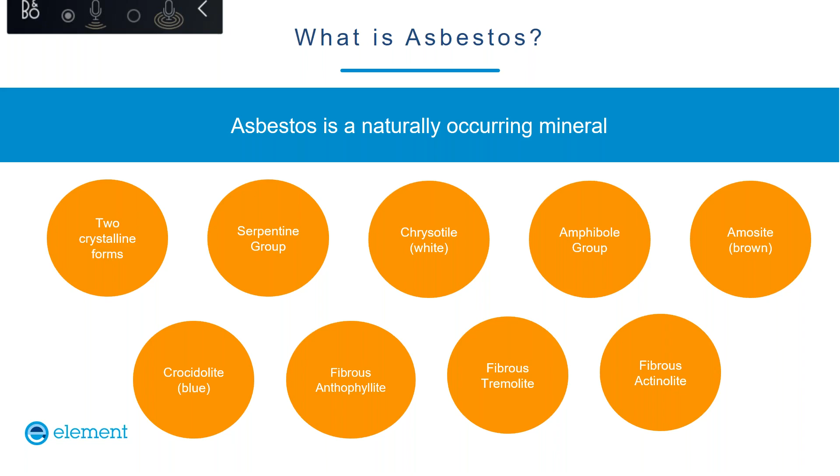It's a mineral found in two particular forms, two different groups. One is called the serpentine group, which is a bit of a misnomer because it contains one type of asbestos, and that is chrysotile. Chrysotile is commonly known as white asbestos because it is white, except when it's green, or blue, or purple, or orange. Chrysotile is the only type of asbestos that can be dyed.

Its crystal structure has hydroxyl groups, so it is very hydrophilic. That's why it's used in cement manufacture so much - it holds the water to allow asbestos cement to cure, but it can be dyed. So do not be fooled into thinking that if you see woven materials that are orange, they may not be asbestos.

The second group is called the amphibole group, and they contain the remaining 5 types of asbestos, as there are 6 recognized. Amosite, with a common name of brown asbestos, crocidolite, common name blue, and then another 3 types: anthophyllite, tremolite, and actinolite. The last 3 are not particularly commercially used at all.

They have some issues with them, of course the health issues. They appear in a number of places as contaminants really. Tremolite is quite commonly found in the mountains in Ras Al Khaimah, Fujairah, as is chrysotile.

But it's the fact that these things are rocks which makes them great for the purpose they're used for. It's rock, ground down into fibrous material, chemically resistant, fire resistant, heat resistant - and it is those particular properties that make it so good as a building material. It's unfortunate that it's exactly those same properties that cause it to be hazardous.

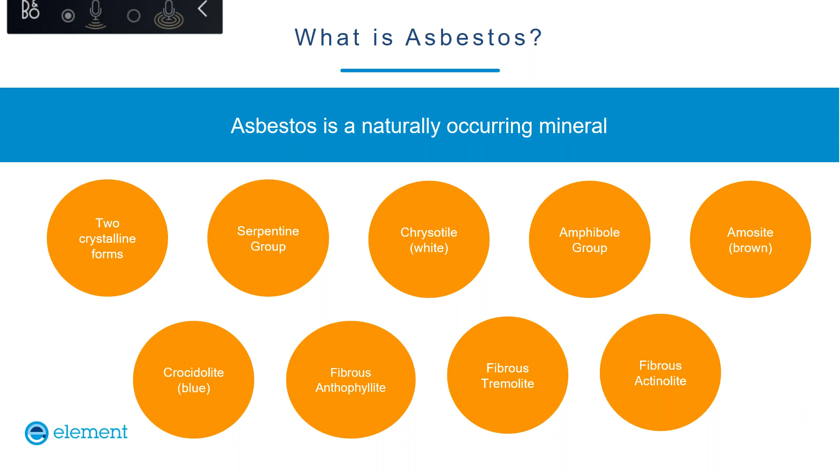Just a quick brief through this. I'll let it run. It's just to give you an idea that it's been around for a long time.

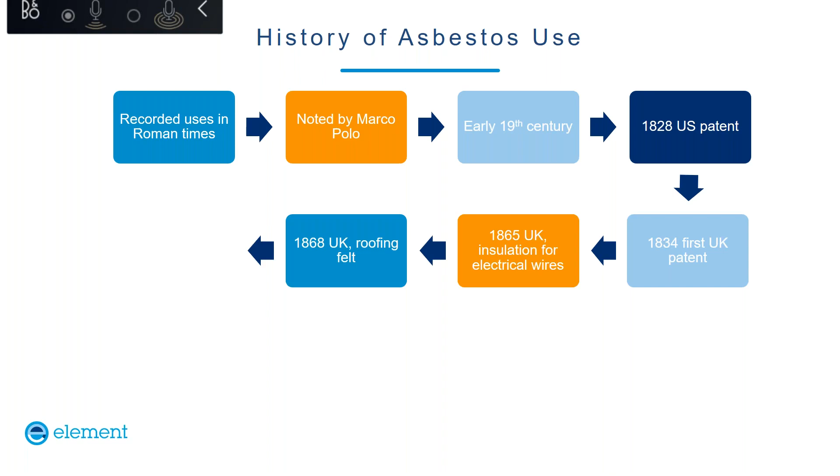Most people would assume this is something invented in the 60s and 70s, but the earliest recorded use of asbestos, and this is guesswork, is in Roman times by Pliny, who wrote about the never-ending wick used in the temples of Vesta. That is almost certainly a case of woven chrysotile.

It was noted by Marco Polo in China, where they used it in tablecloths, and quite usefully, once the tablecloths got dirty, they simply threw them into a fire. It burned everything else off, and they took the tablecloth back out. So it's been around a long time.

Its first uses were in the early 19th century, in the 1800s, when it was used for insulation material. In the UK, the first use was in 1865, even in 1868 in roofing felt. So we're talking 150 years here that it's been in use, in construction boards, and then it obviously became the wonder building material in the 60s and 70s.

Just because you might be dealing with buildings - although it's different in the UAE, there aren't that many old buildings - but taking a wider view, just because you're dealing with buildings perhaps older than the 70s, there's no likelihood of asbestos - that is simply not true. The material has been around and been used for a great deal of time.

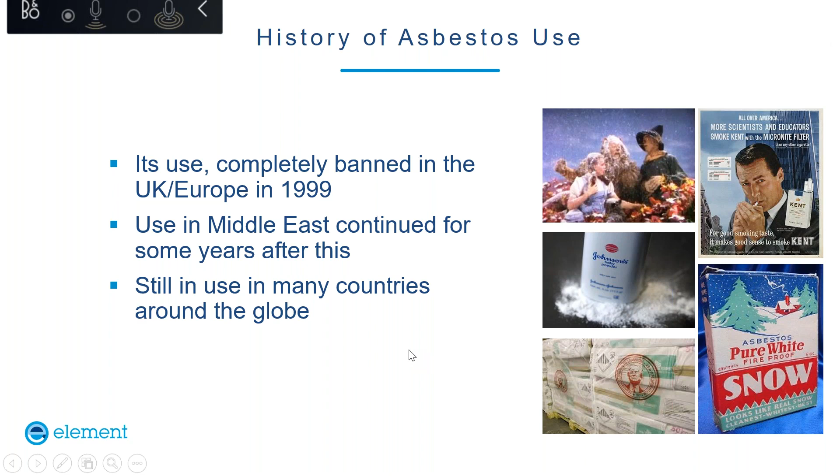Nope. Why is it not moving on now? Thank you. Anyway, yeah, clearly an obvious question.

Why is asbestos dangerous? As I've said, it's a rock. It's resistant to chemicals, to heat, etc. So we have asbestos.

Asbestos has the wonderful property that, although it's a rock, if you break it up, it cleaves down to smaller and smaller fibers. It cleaves along the unit cell and becomes finer and finer and finer. Those fibers can become extremely small, microscopic, and they can be breathed in during disturbance.

So the major health effects associated with asbestos are to do with the inhalation of airborne asbestos fibres. There are some health effects associated with ingestion of asbestos, but they're not so common. And people may ask, well, who on earth is going to eat asbestos?

But if you happen to be in the US, the vast majority of their interstate water pipelines that were laid in the 50s, 60s and 70s, carrying water from wetter areas to their arid states, are through chrysotile asbestos cement pipes, which slowly degrade and bleed asbestos into the water. So there is in fact even a World Health Organization limit for asbestos in drinking water for that particular reason.

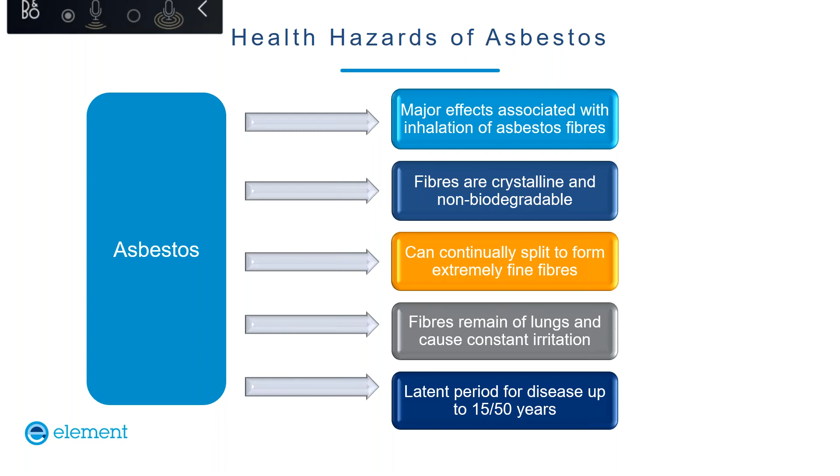Right to the far end of the lungs, to the alveoli, where gas transportation takes place, and they can sit there for many years and not biodegrade. So they just sit there, irritating the lung for years upon years. That can build up calcification, and form all sorts of other issues and diseases, which can take anywhere from 10, 15, 20, or 30 years before the occurrence of a disease.

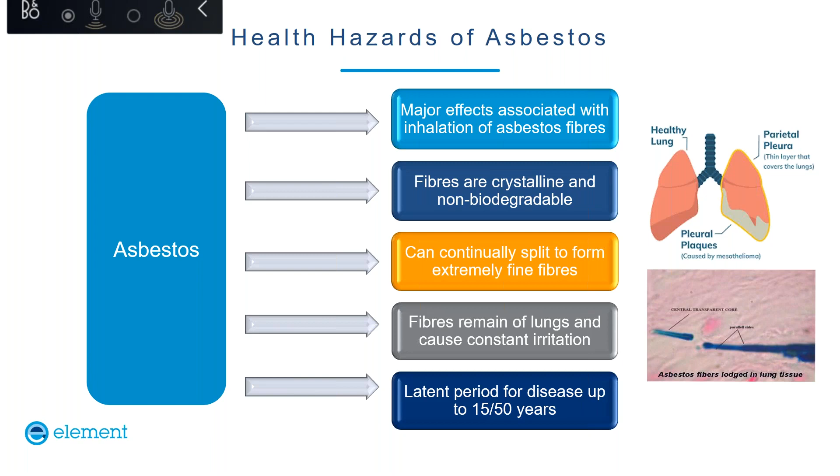So trying to track back asbestos exposure is an extremely difficult thing. A couple of pictures there, unfortunately post-mortem, which is really the only way to identify asbestosis or mesothelioma in the lungs. So, having said what the problem is, because they can sit there for years...

What are the most common diseases associated with asbestos? The one that everyone knows about, or most people will have heard of, is asbestosis. Asbestosis is actually a form of pneumoconiosis, a Greek word that quite literally means dust in the lung. There are three types of pneumoconiosis: asbestosis, silicosis, and miner's black lung disease.

The other two forms, if someone is removed from that particular source - if they're a miner and they're taken out, or a stonemason who develops silicosis and is taken out of that environment - then there is every likelihood of some form of recovery, and they will not degrade any further.

However, asbestosis is not like that. Once it's been diagnosed, yes, removing someone from the source of exposure will potentially help and slow the progression of the disease, but invariably it is a fatal disease, and can continue for perhaps 4, 5, or 10 years.

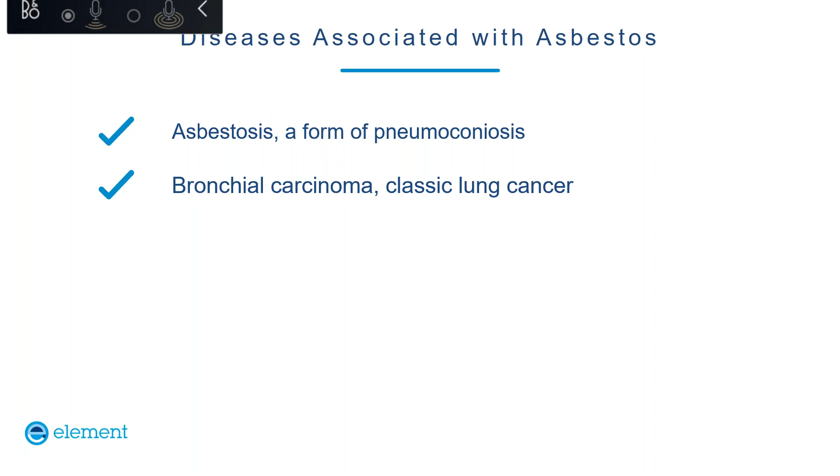It is not really appropriate now for anyone on this call, as we are not asbestos workers. Again, it's associated with classic lung cancer, bronchial carcinoma. If you're exposed to asbestos regularly and smoke, the risk factors increase almost exponentially. There are some other cancers of the gastrointestinal tract and larynx, where people have ingested asbestos.

Pleural plaques, thickening conditions - this is where some of the fibers sit in the lungs over many years, and what the body does to protect itself is build up calcium around that particular area, and that part of the lung is affected by what's known as a pleural plaque and becomes non-functional. In reality, most of us, unless we're an Olympic athlete, have a great deal of excess capacity - 30-40% excess capacity in our lungs. So if small areas become non-functional, it's not a particularly serious issue.

What is a serious issue is a disease called mesothelioma. There are two types, pleural and peritoneal. Principally associated with asbestos inhalation, pleural mesothelioma is a major killer. It is a cancer of the pleura, which is a lining of the lung.

Without sounding dramatic or meaning to frighten anyone, mesothelioma has never been shown to be dose related. In theory, and I stress this only in theory, a single exposure at any time to asbestos can result in a mesothelioma 5, 10, 15, or 25 years later. Clearly it's very difficult epidemiologically to prove that - how do you go to a doctor, be diagnosed with mesothelioma, and say, oh yeah, I remember I was exposed to asbestos 28 years ago last Tuesday. As I said, in theory, a single exposure can result in mesothelioma.

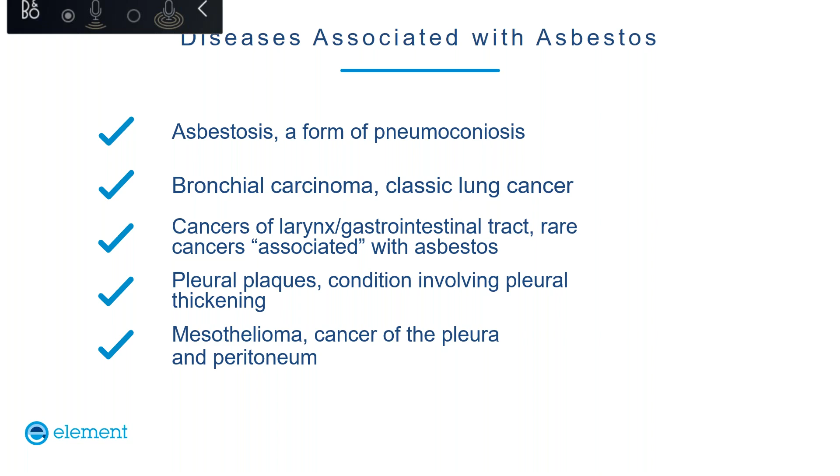That is the major cause of concern, because quite simply, this is how most people become exposed these days - accidentally, in drilling holes in walls, knocking down ceilings, changing pipes, this sort of stuff. So that is the major concern going forward.

Just a couple of pictures here - the first is club fingers, which is a very common side effect of asbestosis. The second is a picture of someone who has a combination of mesothelioma and asbestosis, in an X-ray taken post-mortem.

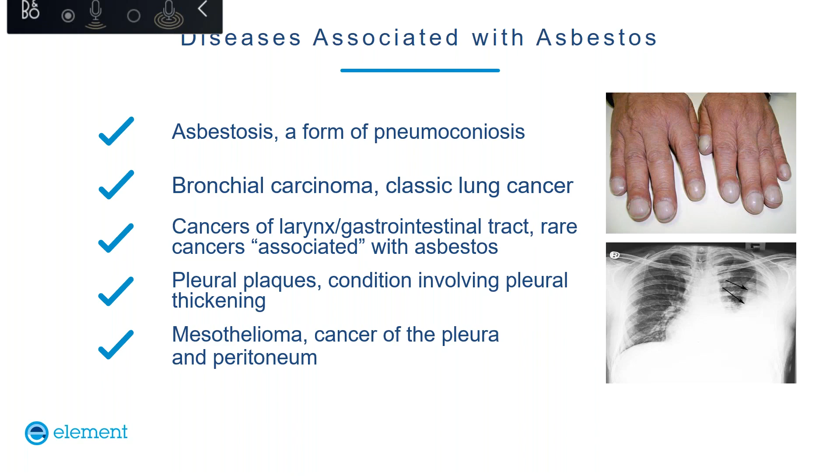So, as I said, without scaring anyone, why is it still a problem? Well, at the moment, I'm taking these figures from the UK and Europe, where figures are readily available - they are not so available in the Middle East. So I think we have to take some inference from these UK figures and extrapolate if we can. Over 3,000 people die each year in the UK.

It's the biggest industrial killer. More people still die in the UK from asbestos-related diseases than are killed on the roads. So, it's very, very serious business. Figures are not available for the Middle East, but I think for us to say the problem doesn't exist would be complete nonsense. We know it does.

One of the other things about asbestos - and I run across this quite a lot - is that people find it, and the first thing they want to do is start ripping it out and getting rid of it. Going back to what I said earlier, the major health issue associated with asbestos is the inhalation of asbestos fibres. Asbestos materials that are tightly bound, well covered, sealed, do not release asbestos. So just because people find asbestos does not mean you immediately start hauling it out, where you may in fact be creating a problem where one doesn't exist. That's worth mentioning.

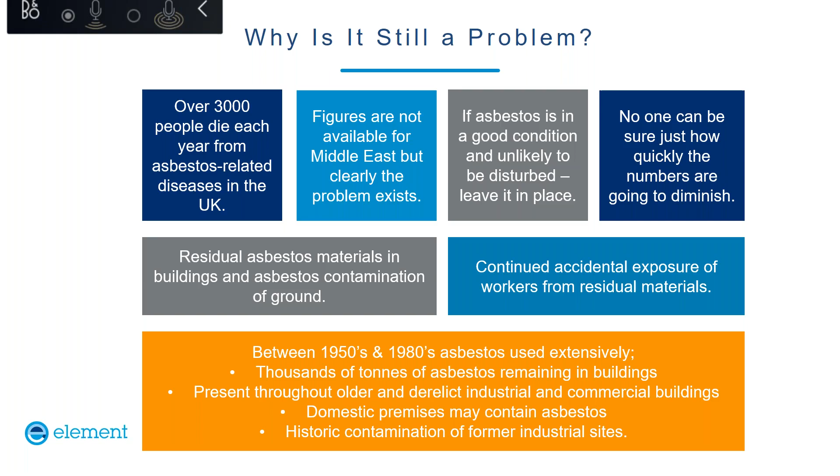I'm talking here about Europe, the UK and the US in the 50s to 80s - it was used extensively. In my experience in the Middle East, there is asbestos in buildings, but of course a lot of the newer buildings are built without asbestos. But even in some of the more recent ones, I found asbestos materials where people had them lying around, so they've used them. So it is still in existence, and you must still be very, very wary of it.

Who's at risk and why? As I said earlier, the largest single group are building and maintenance workers - people accidentally exposed to asbestos during works that you or I may send them in to do. We have a duty of care to these people to make sure they are not harmed in any way by the actions we're asking them to take. So, plumbers, joiners, all of these types of people.

It's a very major issue in the Middle East - I'll come to legislation, but a lot of it exists, yet very little of it is put into place. But that does not, in any shape or form, reduce our liability and duty of care to anybody we send out to do work.

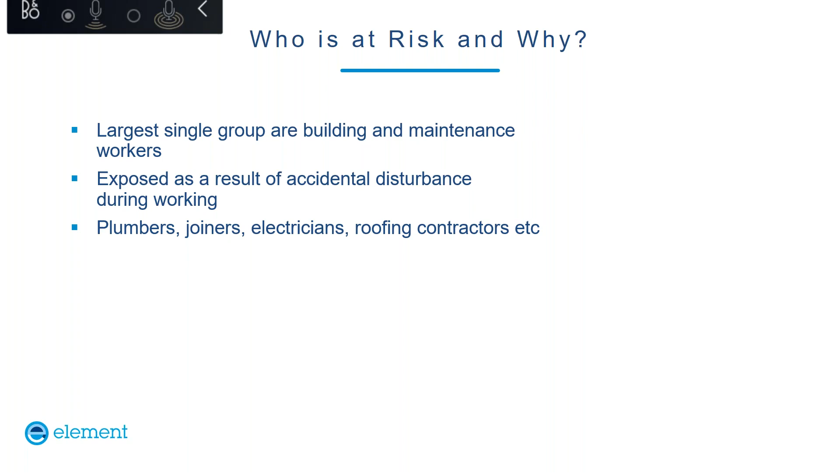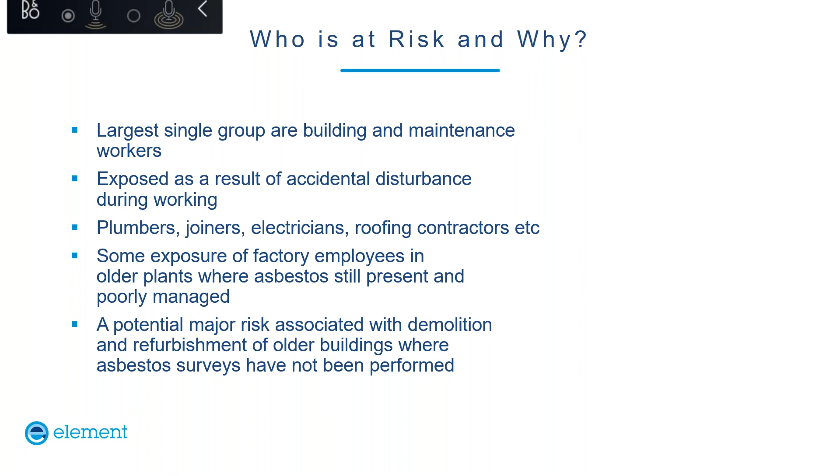Demolition is quite an interesting one. I've been called out to several sites in both UAE, Abu Dhabi and Dubai, where asbestos was suspected prior to demolition, only to find out when I got there they'd decided they couldn't be bothered waiting a few hours, and the demolition had taken place. The area is no longer safe. So you can see these sort of things, just accidental. Clearly the first one, demolition. Second one, maybe refurbishment, accidental exposure. These are major issues, and these are the major routes for exposure now, given that we clearly don't have an asbestos business making lagging or asbestos materials.

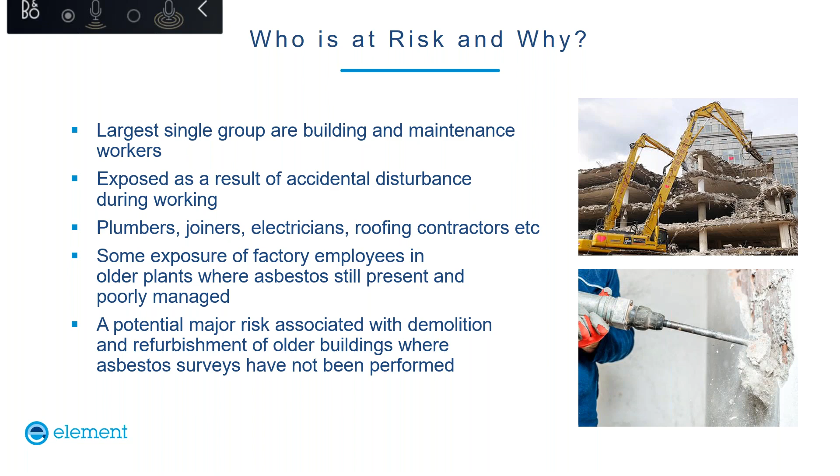I apologise if I'm preaching to the converted here, but I'll go through it quickly. Abu Dhabi is quite an interesting emirate. It has very significant and extensive regulation concerning asbestos, a complete and direct copy of UK regulation, right down to typographical and spelling mistakes in some places. It's put into place on some major projects, but generally not as routine on smaller works. They don't seem to worry about it too much. It's very much a case of some very good, extensive regulation being applied on major projects where people are looking, but perhaps not quite the case on smaller works or smaller contractors at all.

Interestingly, they started up this asbestos technical specialist registration, or asbestos management specialist, which I have, and then they suspended it recently. I'm careful what I say, but the system was subject to internal audit and promptly closed. So I'll leave you to decide your own thoughts on that.

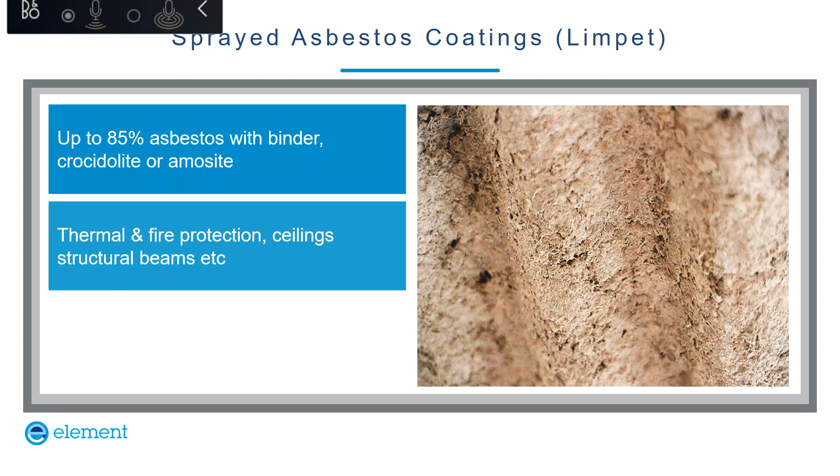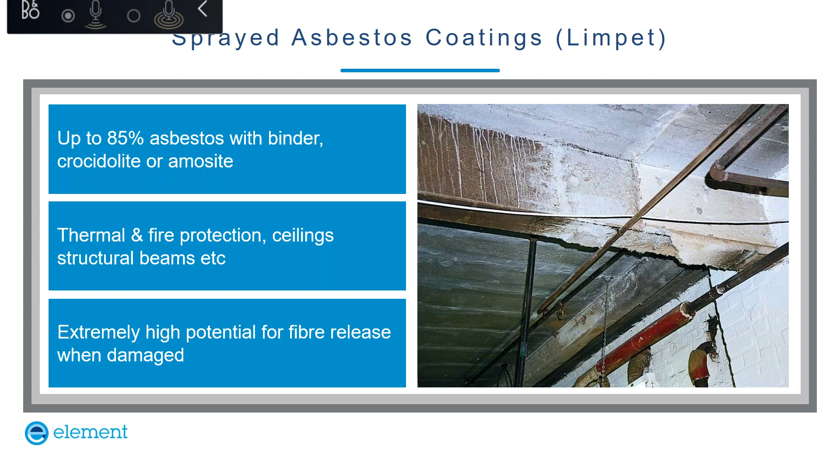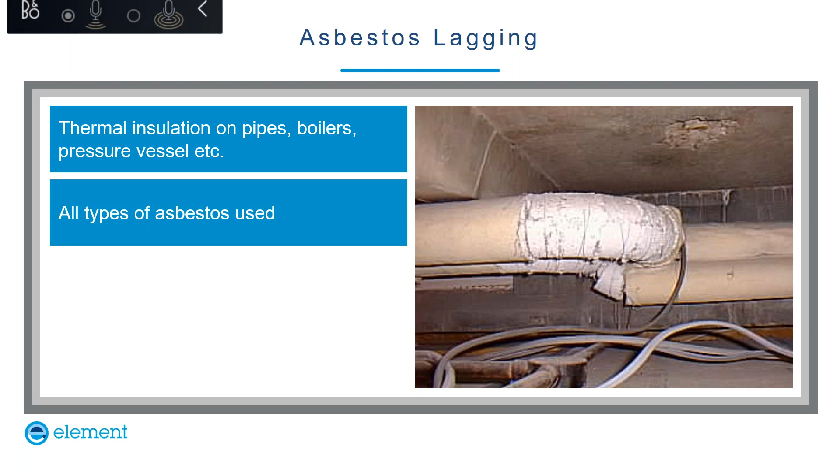Classic asbestos lagging that everybody knows about: pipes, boilers, pressure vessels, you name it. They can use any types of asbestos in any sort of concentrations in there. Again, they're usually coated and sealed on the outside, but once that seal breaks, the potential for fibre release can be really quite high.

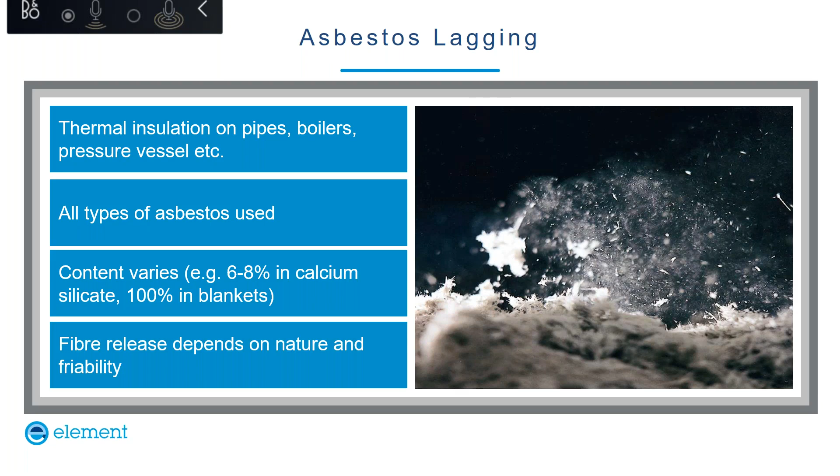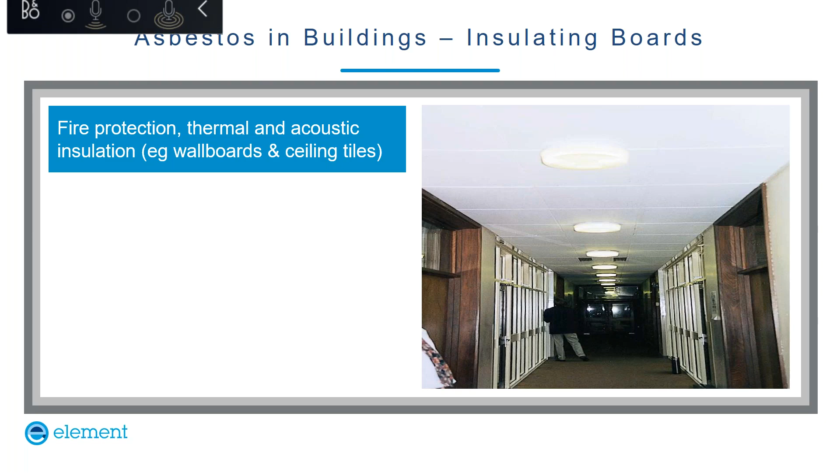Thermal fire protection, ceiling tiles, acoustic ceiling tiles, wall boards, etc. As long as they're sealed and intact, they do not present a particular significant risk. They need to be managed, but it's not a risk.

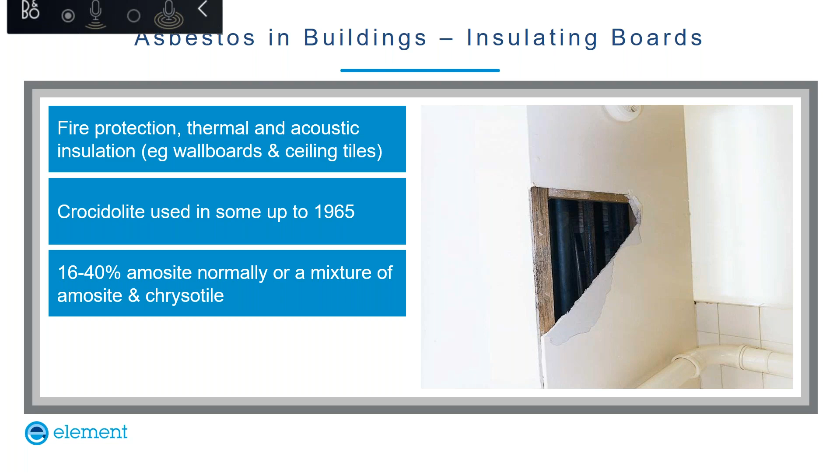But clearly, in some of the older buildings, or in buildings that are not well managed, these wall boards or tiles become broken. Once they are broken, there is potential for exposure and release of asbestos fibres. They contain a great deal of fibre, some up to 40% asbestos in the boards. And once they become broken, they are really friable, with fibre release to a great extent.

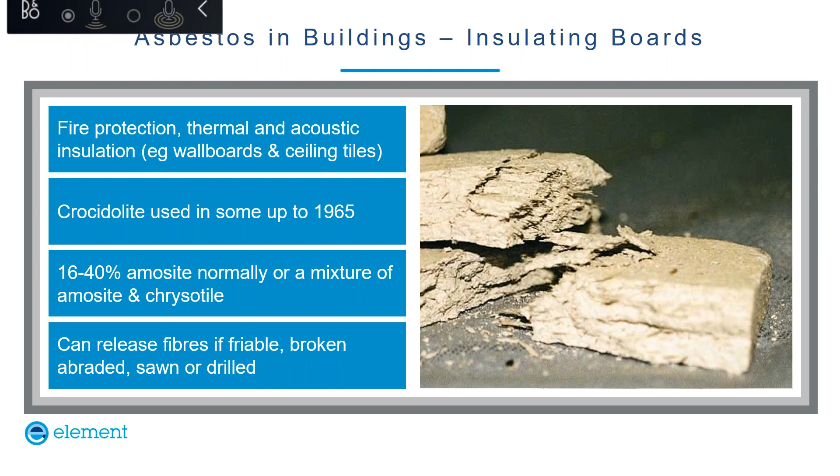If you're sending people in to fix light fittings or something on a wall, and they're drilling through wall boards that are actually asbestos, they will release significant amounts of asbestos fibres and thereby be quite severely exposed.

The classic asbestos cement. 95% of all asbestos usage in the world is in asbestos cement, or was, of which 95% of that is chrysotile white asbestos. Because of its hydrophilic properties, it allows asbestos cement to cure quite well. Prior to 1965-66, blue asbestos was also used.

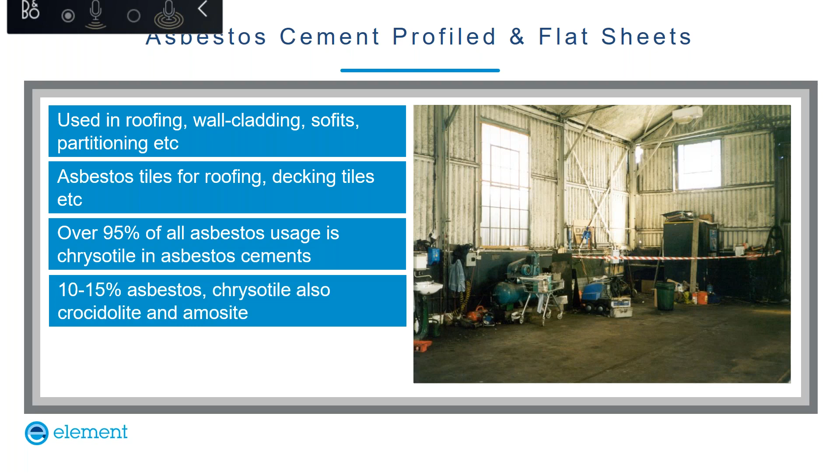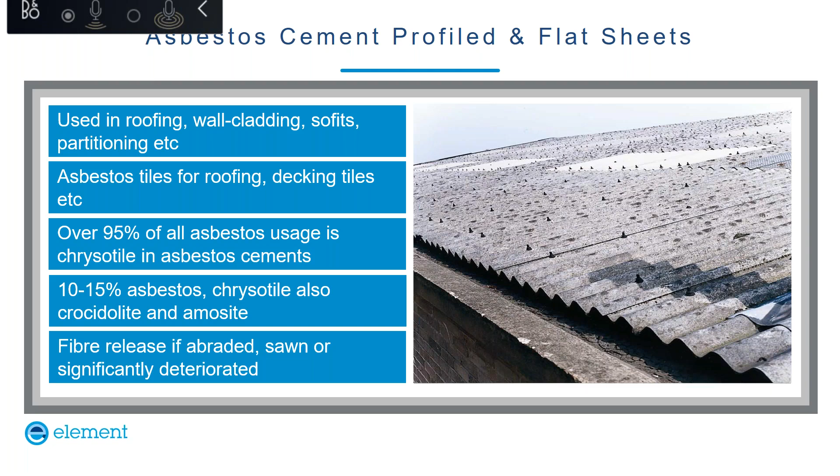Profile sheets - you know what they look like, be aware of them, you'll find them everywhere. Nicely intact, there's no particular issue apart from management, but often people decide they want to take them off, or they'll just get a hammer because they want to put a chimney or a pipe through them and smash through them. Of course, if you're doing that, you will release asbestos fibres.

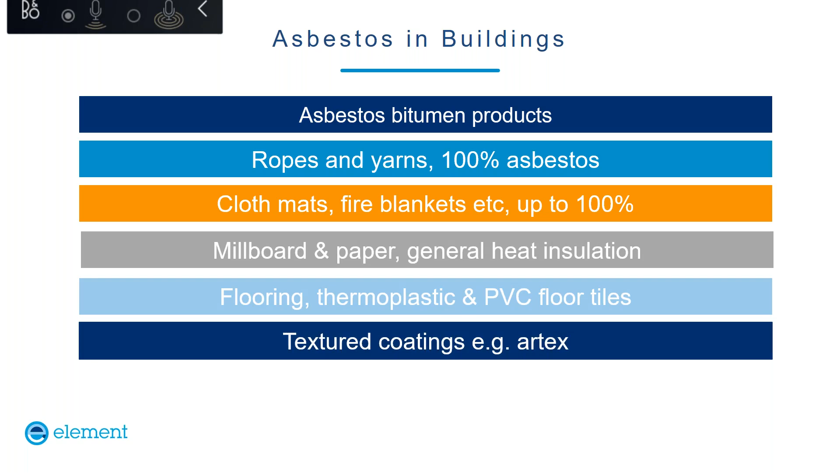Other things: bitumen products, sealants, ropes and yarns, asbestos fire blankets, mats, all sorts of things that contain asbestos. Texture coating, Artex, and mastics.

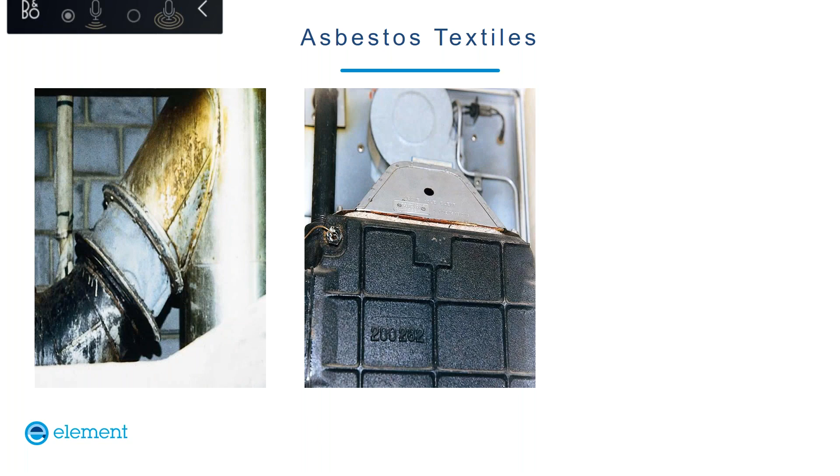I'm just doing this briefly. You can see there's some woven asbestos fire textiles used as gaskets, used on flues, and fire blankets.

Asbestos tiles - there is no major health and safety issue, I think, with asbestos thermoplastic tiles. But if you're demolishing a building and you haven't removed these tiles, you end up contaminating whole loads of the demolition rubble that perhaps you may even have wanted to use as a resource for infill, and it now becomes a very, very expensive waste product to dispose of.

Fuses, strangely, toilet cisterns, everything - you name it, asbestos can be in it. So just be aware of that, that just because you think, oh no, don't be silly, nobody would put asbestos in a toilet seat - they may very well have done so.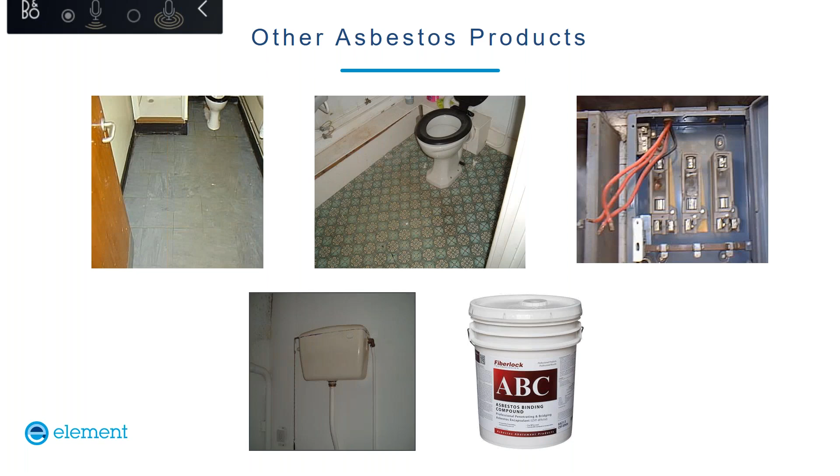So hopefully I've not worried anyone too much, but clearly there's a lot of potential for asbestos materials out there, and there are some very, very significant health issues associated with exposure to asbestos fibres.

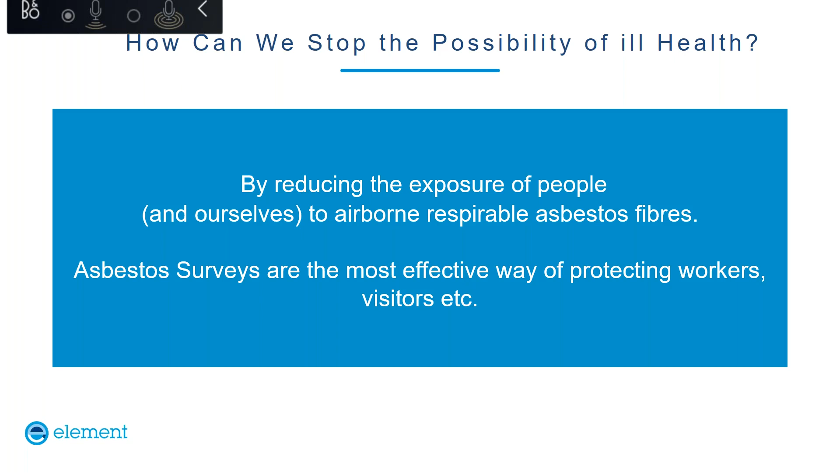How do we best prevent that? Clearly, the main way is to reduce the exposure of people to any airborne fibres. Going back to what I said previously, currently the major exposure of people to asbestos is accidental, maintenance workers. So effectively, how do we protect those workers and visitors?

One of the best ways to do that is to carry out asbestos surveys. You can use these surveys for all sorts of reasons, but clearly one of the most important is in managing any asbestos you find. The first part is to check if you have asbestos or not - that's of major importance. If you don't know you have asbestos and you send people in and tell them to knock a hole in your ceiling, you don't know what the consequences may be.

There are different types of asbestos surveys, and I'm quoting here from the UK guidance - sorry, the UK guidance has now changed, but they haven't actually changed the UAE guidance. But I'm talking in general terms there from European legislation.

Obviously, if people go out doing surveying, they can do a combination of taking samples or presuming them, or visual inspection. But someone will need to decide, if you're doing any refurbishment works or demolition, the extent of these works.

There are two main types of surveys. A management survey, which is used for managing any asbestos found in used or occupied buildings still in use. Part of that management process may be to remove the asbestos, or it may be to leave it in situ, as that is safer, and simply monitor and manage its condition and exposure. If you know a certain ceiling or wall is asbestos, you can inform maintenance workers to either not work on those areas or take appropriate precautions. Management surveys involve some minor intrusive works, lifting ceiling tiles, looking above ceilings, under floors. Essentially, it will find any readily available asbestos.

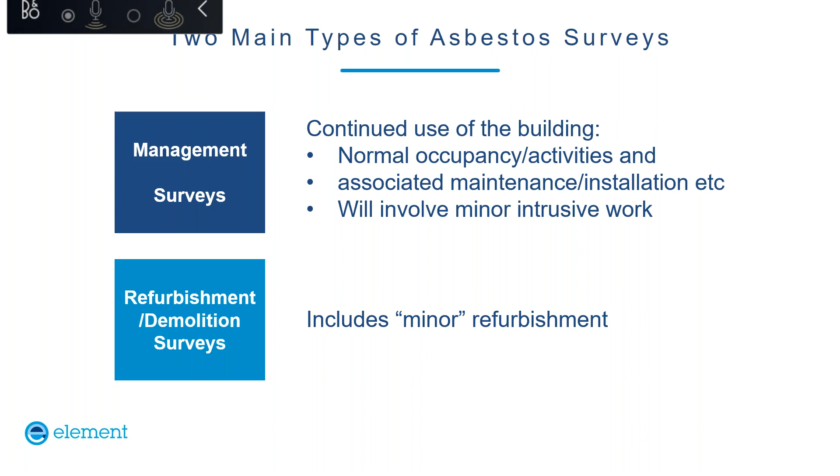The second type of survey is more intrusive, the refurbishment or demolition survey. This will involve a much more intrusive survey. Clearly, if you're going to demolish a building, you want to find everything in it.

Just a quick look through this. A management survey looks at all readily accessible areas, walls, pipes, ceilings, etc. There'll be some caveats, as there'll be areas where it may not be practicable to access, if you have solid ceilings rather than lift-out ceiling tiles. Those would not be breached in a management survey, but there would be a caveat to say those areas have not been inspected. That's actually a clear difference from a demolition survey, where those solid ceilings and solid walls would be breached to see what was behind them.

Management surveys identify all readily available asbestos, and provide information on the condition of any asbestos containing materials found, and recommendations as to what to do, which may be remove, monitor, or repair. You can use that to form an asbestos management plan for each building. But if asbestos remains in situ and is being managed, there should be re-inspection surveys on a regular basis, at least annually, to check for any deterioration in the in situ materials.

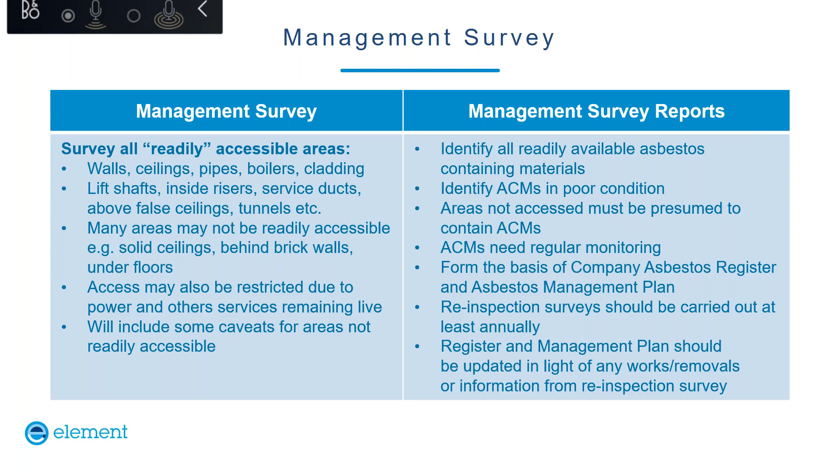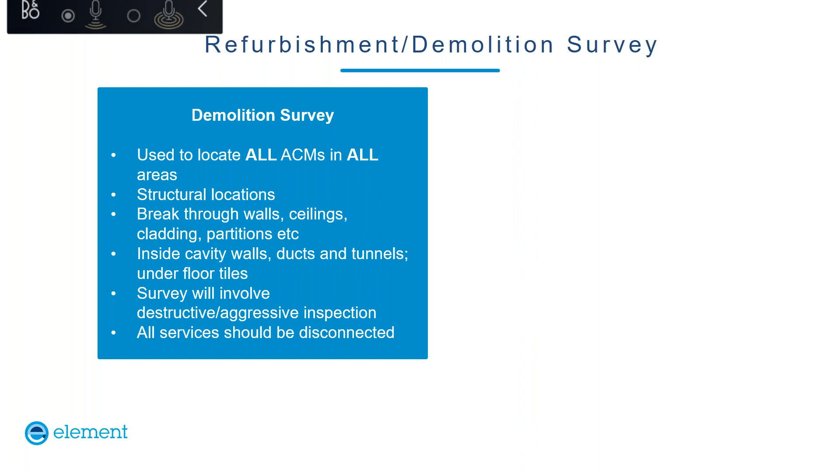Demolition surveys are used to locate all ACMs. You're talking about taking sledgehammers through walls. It's incredibly destructive. So please don't ask someone to do a demolition or refurbishment survey and then complain later that there's a hole in your wall, can you fix it? That's not what it's all about. Clearly, again, there are health and safety issues. It's a team of people, not individuals. Services should be disconnected, etc. So all of that needs to be looked at.

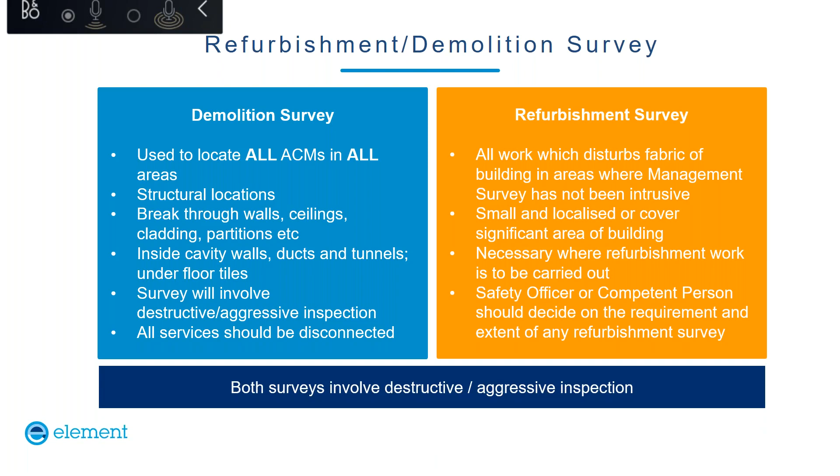A refurbishment is essentially a limited demolition area, where if you're refurbishing a particular room or small area, you carry out essentially a limited demolition survey there. But the extent of these surveys needs to be agreed with all parties, safety officers, the refurbishment team, to make sure the correct areas are accessed and looked at. These surveys are destructive and aggressive.